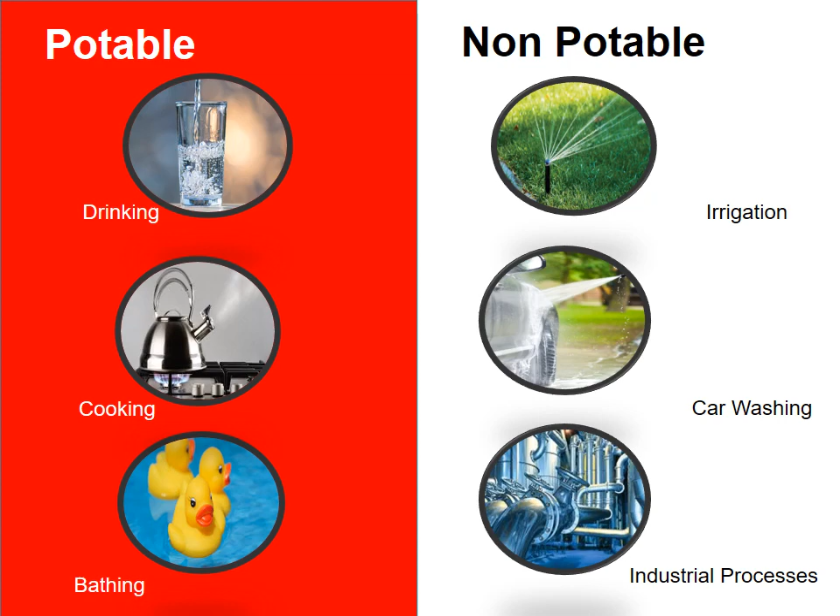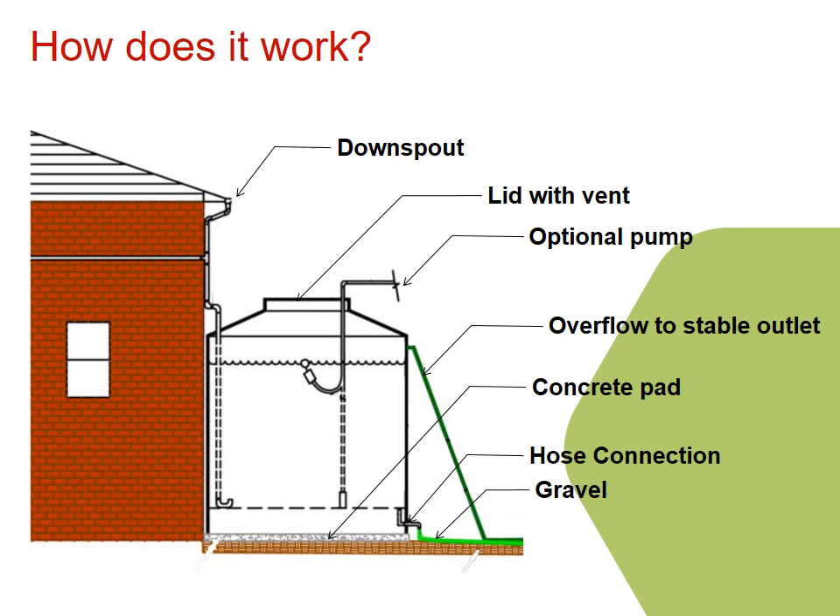Rainwater is collected from an impervious surface, typically a rooftop. Using gravity, the rainwater flows across the surface into gutters and is conveyed through downspouts to a storage tank. Rainwater can be collected from other impervious surfaces, such as sidewalks, parking lots, playgrounds, and even roadways. However, the rainwater flowing across these surfaces is likely to carry more debris and have higher pollution levels.

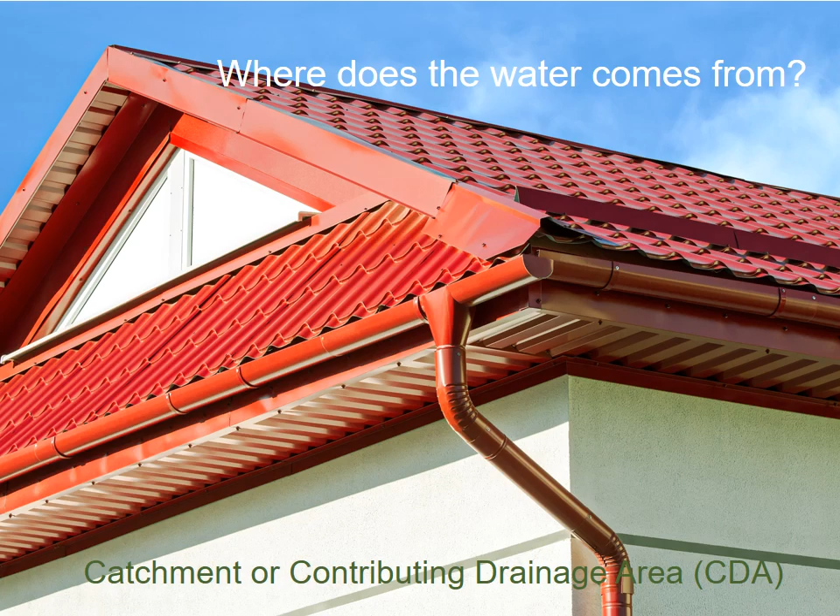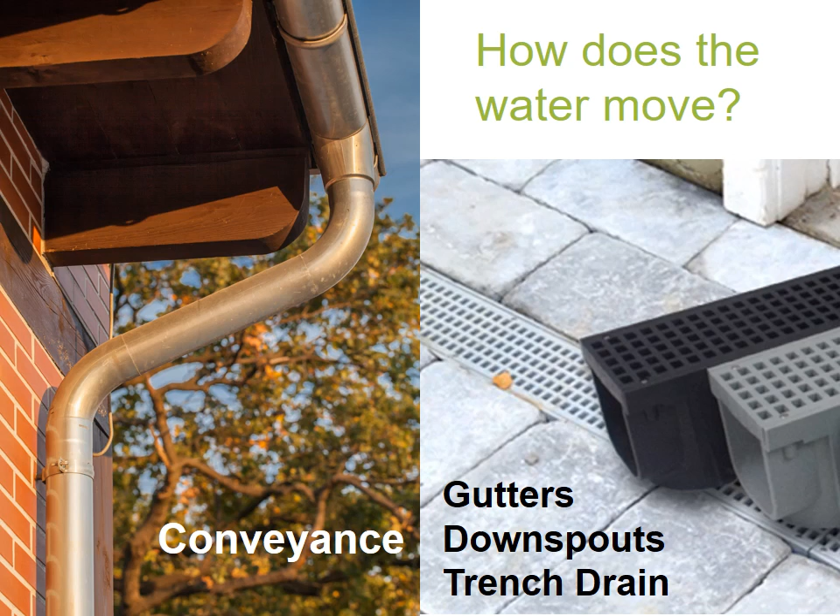Whether rooftops or parking lots, all surfaces that rainwater flows across to fill the storage tank define the tank's catchment or contributing drainage area. Collecting rainwater flowing across any surface requires a device to funnel the water into the tank. The combination of gutter and downspout is the standard approach to conveying rooftop runoff. Trench drains are typically used for ground-level surfaces. Once water is collected and directed towards a storage tank, it needs a way to get into the tank. This is called the inlet.

A tank is used to store the water for future use. If the tank holds less than 500 gallons, its common name is a rain barrel. Residential rain barrels may hold less than 150 gallons. A tank holding larger volumes is often called a cistern. Cisterns or large rain tanks can store thousands of gallons.

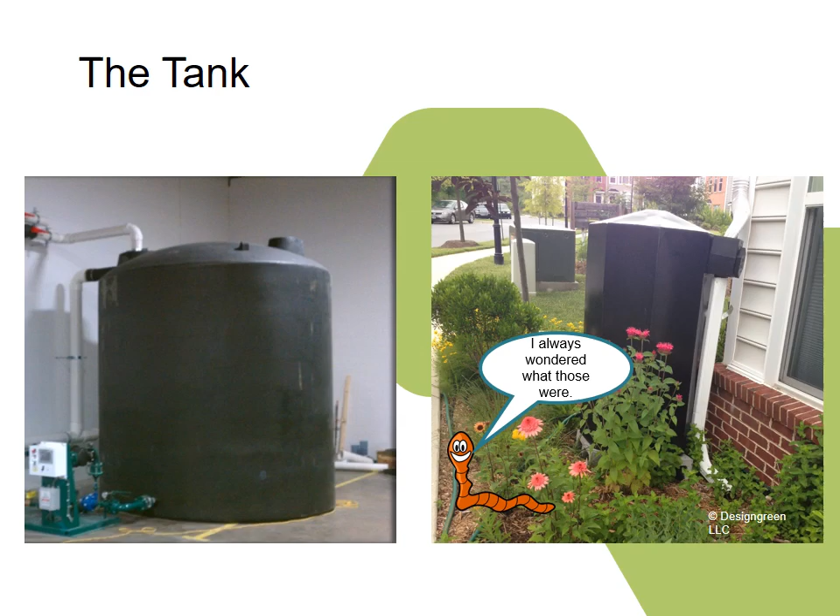Rain barrels and cisterns come in all types of colors, sizes, and materials. They may be made out of polyethylene, concrete, galvanized steel, fiberglass, or stainless steel, all of which are rust and chemical resistant. While most tanks are rigid, there are flexible pillows made out of reinforced polymer alloys that can be used when space is a challenge.

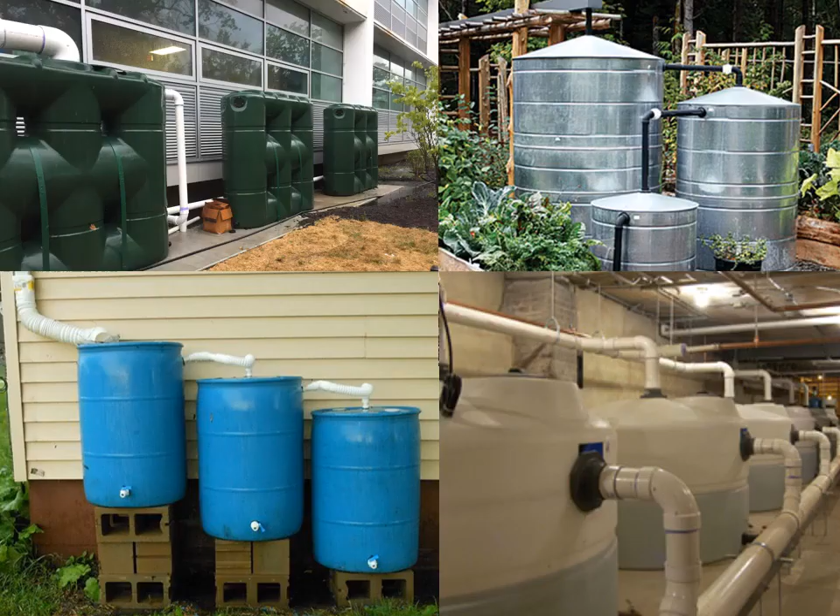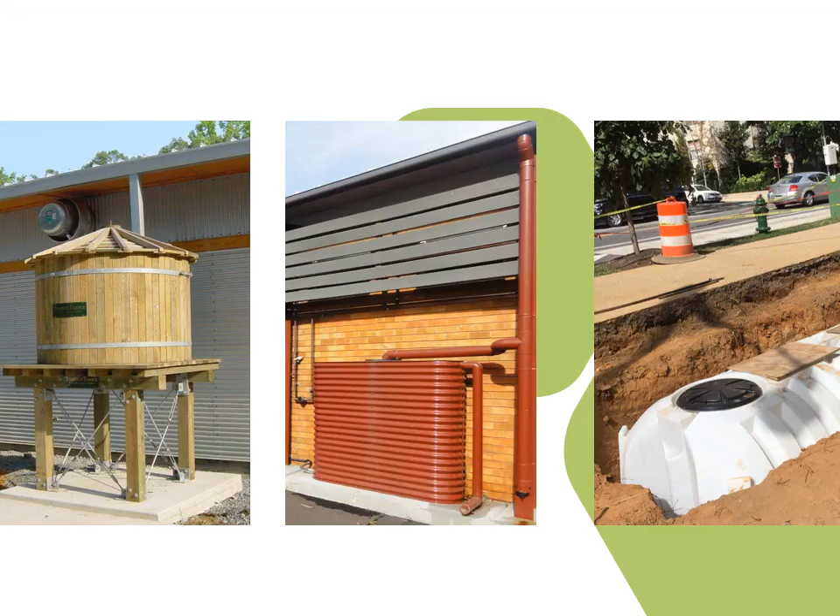Multiple tanks can be interconnected to increase storage when the area for the tanks is narrow. If interconnected tanks are arranged on steps, the elevation adds pressure, helping to increase the speed and forcefulness of the outflow. Tanks can be positioned on a structure at ground level or in an excavation below grade. A RiverSmart School rain tank will likely be above ground and opaque to prevent exposing the stored water to sunlight, decreasing the chance of an algal bloom.

An outlet is key to accessing the stored water for future use. A rain barrel's outlet will have a spigot. Connecting a garden hose to the spigot, you can use gravity to water plants downhill. Some cisterns have pumps and piping to send the stored water to locations when gravity won't do the job. What happens when your storage tank is full or the intensity of the rain exceeds the inlet? An overflow allows excess water to safely bypass the system.

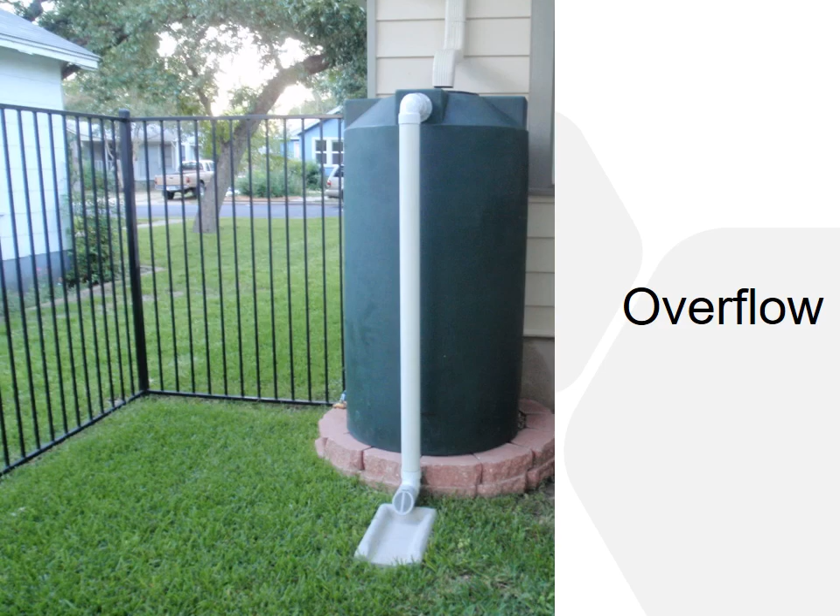During dry weather, the rain tank's catchment can build up bacteria from decomposed insects, birds and animal waste, leaf litter, and pollen. It is important to prevent these undesirable elements from being washed into the storage tank with the first rain. This issue is addressed when screens and diverters are included.

If rainwater is harvested for outdoor irrigation and the water is dripped, then treatment is not required. However, if the water is sprayed or used to irrigate edible plants, it will be important to consider water quality. A RiverSmart school site delivering harvested rainwater in any form other than drip irrigation should have a treatment component. It will be important for RiverSmart caretakers to be able to identify if their site's rainwater harvest system has a treatment component and know how to check for functionality.

In a system improperly managed without adequate maintenance, the water can become contaminated by animal waste, rotting vegetation, and other surface materials carried by the rainwater into the storage tank. Diverting the most polluted water carried by first rains and filtering the rest will not remove all the possible contaminants. A rainwater harvest system supporting edible gardens or using spray irrigation should have a disinfection component. Disinfection is often achieved through chlorination. A sophisticated system with pumps will have an integrated component to continuously release chlorine from an automatic feeder tab. These systems may have additional filters and a UV light.

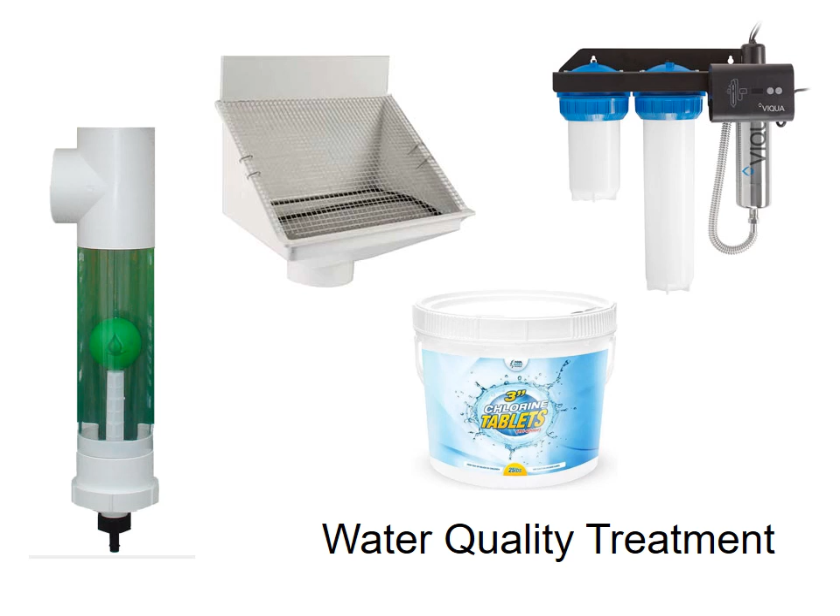Why is rainwater harvesting valuable? Previous modules in this RiverTools series discuss the importance of keeping rainwater close to where it falls. We do this to protect our rivers and streams from the effects of urban surfaces. Rainwater harvesting is one of many strategies used to reduce runoff and help protect our watershed.

This is a sustainable, cost-effective approach to landscape irrigation. It can provide water to locations with little or no water access, and untreated rainwater produces healthier vegetation. The productive life of a RiverSmart School's rainwater harvesting system will rely on the attention of all the site's caretakers.

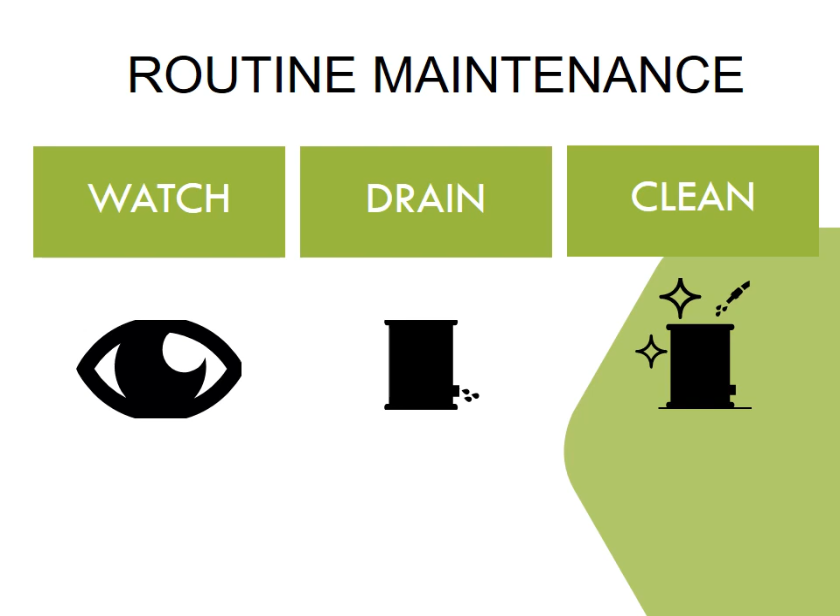If sized, located, and installed correctly, the rainwater harvest system should not require significant inputs. However, non-professional caretakers are the first line of defense. Your observations and regular actions will help avoid issues requiring substantial interventions.

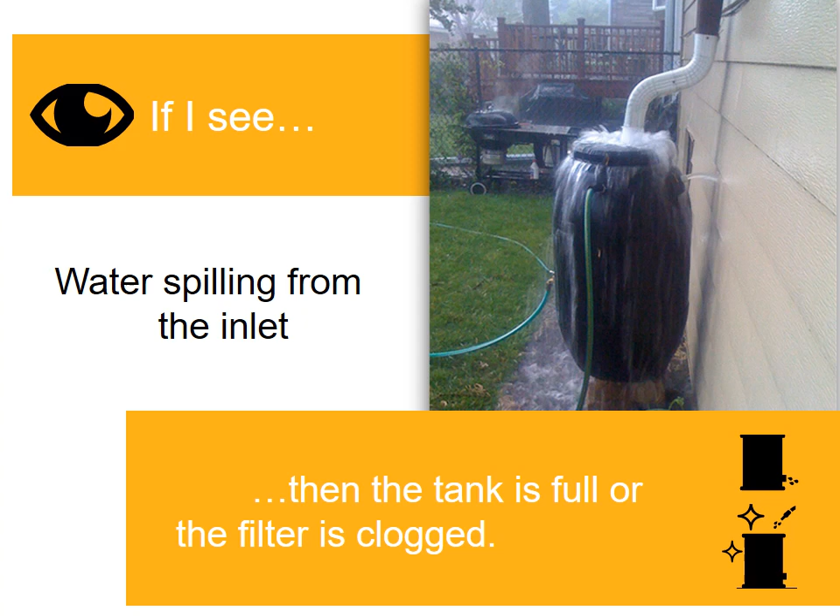First and foremost is observing the system during rain events. If the rainwater is not able to enter the tank, then the tank is either full or the entrance is obstructed. If opening the outlet or spigot creates capacity allowing inflow, then the stored water is not being adequately used during dry periods. If cleaning the leaf litter, screen, or diverter allows inflow, then these components require more frequent attention during dry weather.

Regularly observe the conveyance and storage tank inlets for obstructions. After a recent rain is the best time to take a look. Leaf litter and other debris will build up over time. If the buildup is not removed, rainwater will be prevented from entering the tank. Remove large objects. If there is a filter insert like a screen or mesh bag, temporarily remove this, rinse it, and reinstall. If the filter screen is punctured or the mesh bag is torn, these will need replacing.

Check the tank frequently during dry weather stretches. If the stored water is not being adequately used, the tank will not have room for new water when it rains. If you know a big storm is approaching and the tank is full, open the bottom spigot and let the full tank draw down.

It is important to check component connections regularly. During the wet weather seasons of early spring and late fall, make certain each component is properly in place. Loose connections can provide access to all sorts of animals and insects. Above ground, unsealed tanks are especially vulnerable. You will want to regularly check the tightness of all access points. Use mosquito dunks with systems without a disinfection component.

Take note of overflow. Is it properly connected to the tank? And is there ground cover, rocks, or some other method to ensure any overflow does not cause erosion? If your RiverSmart School site has a large cistern, it may have a chlorination tank. Check with the site facility manager to see if you have a role in adding chlorination tabs. This is typically needed once a month.

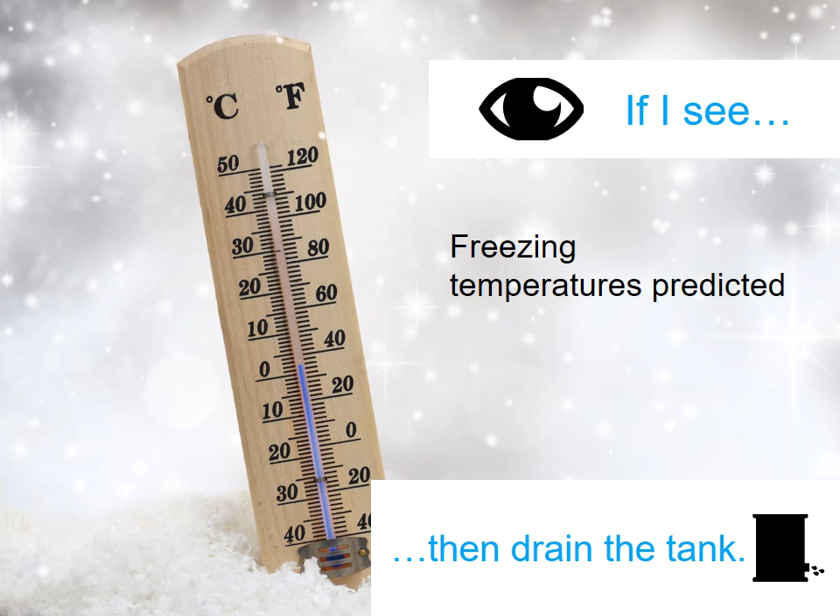If your RiverSmart School rain tank is above ground, you will need to drain and disconnect the inlet during winter months. If water is stored in the tank throughout winter, the freeze-thaw cycle could damage the tank or break component fittings. Once the tank is emptied, set the inlet so all rain events are directed away from the tank through the overflow. Don't forget to reverse the action in the spring once temperatures are above freezing.

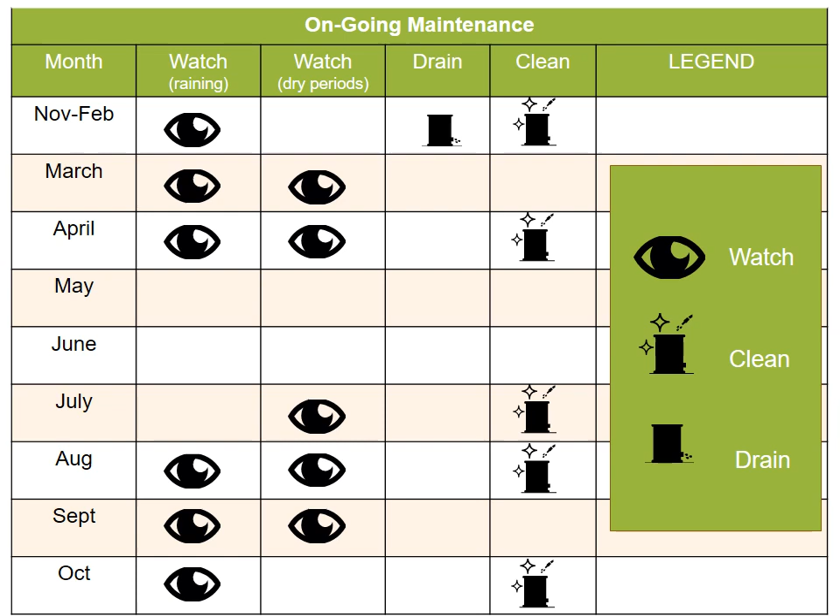Ongoing maintenance of a rainwater harvest system is primarily a function of watching, with seasonal points requiring draining and cleaning. Wet months require the most attention, but don't overlook the dry stretches between rain events to note water use and protect against filter clogging. The most important role you have as a caretaker of a RiverSmart School rainwater harvesting system is to remember to use the water for its design demands. Don't forget, even with a disinfection system, this is not potable.

It is not unusual for the cinder blocks or a concrete slab supporting a rain barrel or cistern to develop small cracks or even have minor settling. However, if cracks or settling are observed when a tank is on an elevated structure, alert an authority immediately. Water is very heavy and a failed support could have catastrophic results.

Take note of any performance issues you might observe. Frequent filter clogging, a dark water color, and odor may indicate a water quality issue. Alert the authorities as the tank may need a professional service.

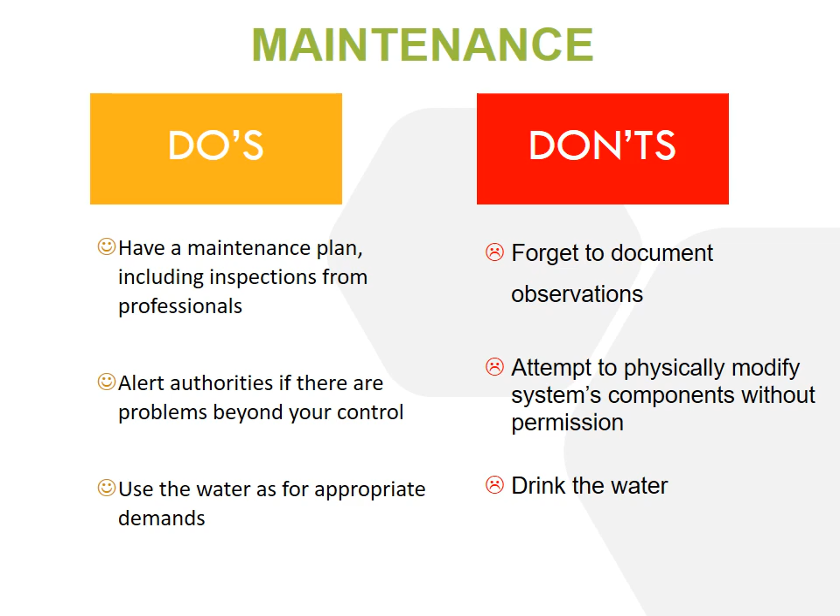Congratulations! You've completed RiverTools Module 5. This completes the series. Use the narrated PowerPoints as a resource to educate others and as a reference to complement the checklist-based RiverTools field manual.